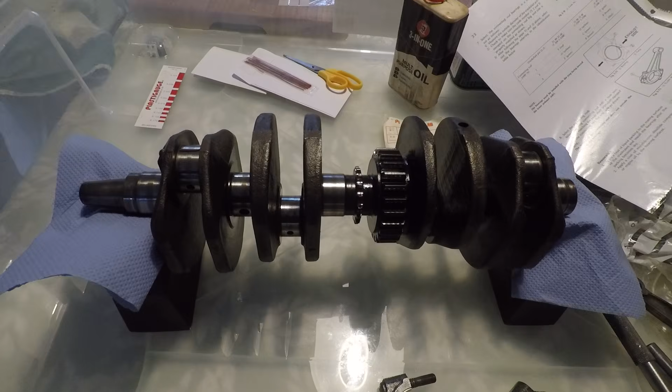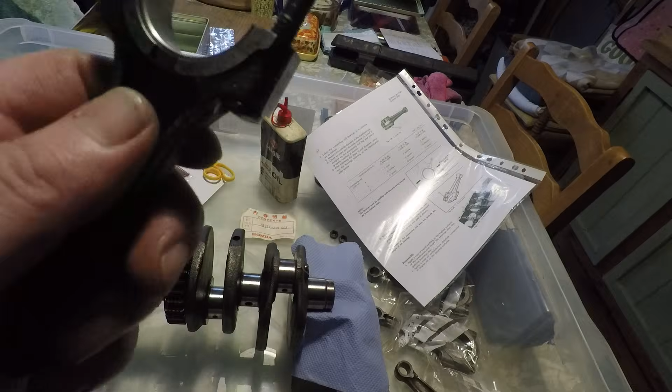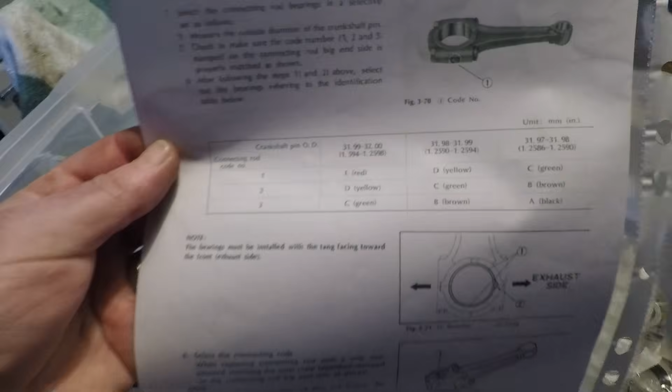Right, as you can see, I've got the crank here. I've managed to get some big end shells. I don't know if they're the right size. Reason being that these rods are supposed to have a number stamped on, so you can then refer to this little chart here. I think I have just lightly gone over this before in another video.

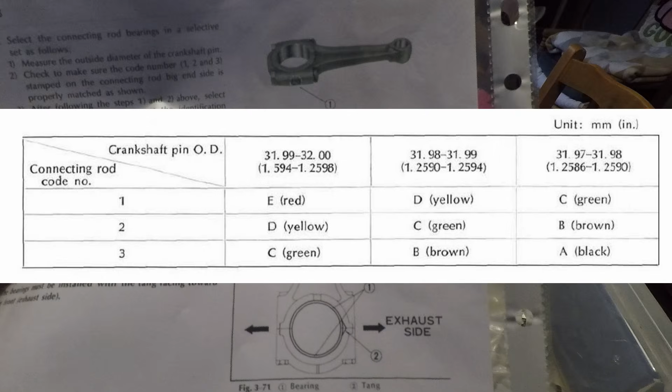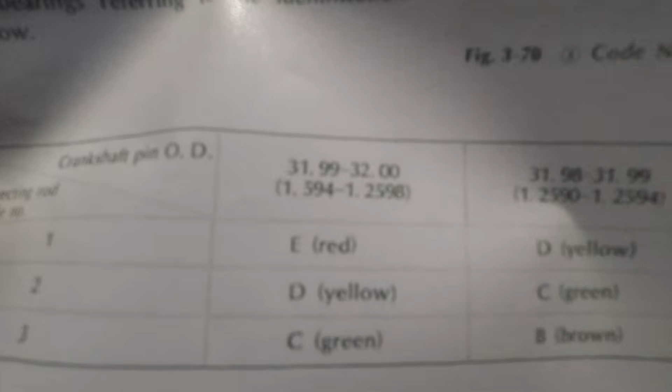So that would be either 1, 2, or 3 stamped on the side of the rod there. I'll put a picture of this up on screen, be easier to see. So you use that and the pin OD of the crankshaft to work out which bearings you need, which shells. They're all colour coded. The ones I've got are black.

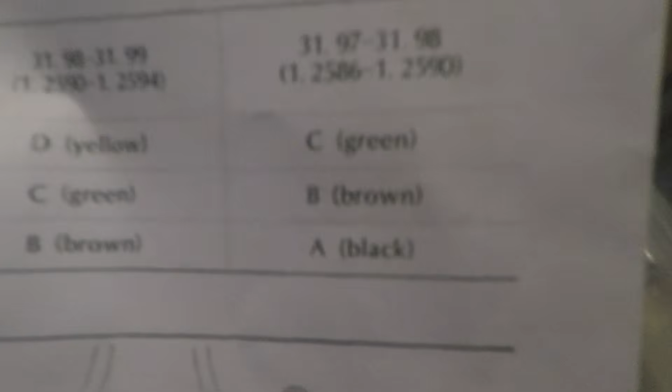I know what size the pins are. I've measured them with a micrometer. Where did I put that? And I'm in the kitchen, by the way. The wife is out, so this is probably the cleanest environment to do this.

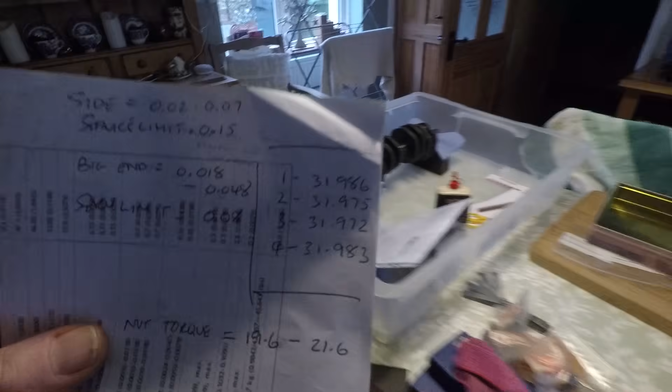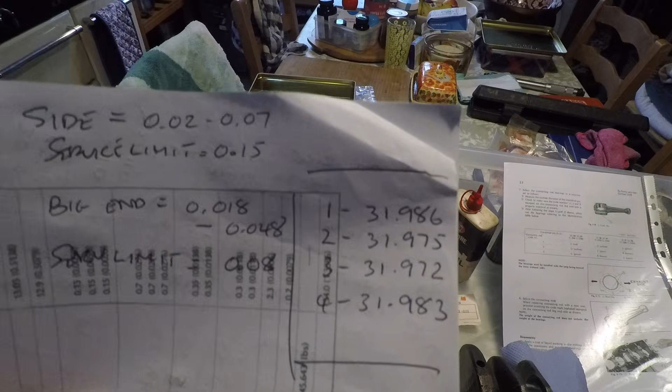Yeah, so they're the pin ODs I had. This is number 1. Yeah, so they're all sort of within that first row there. So, which means they need black, brown or green shells.

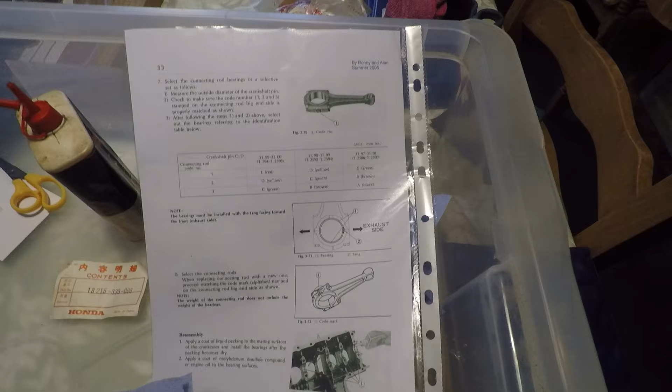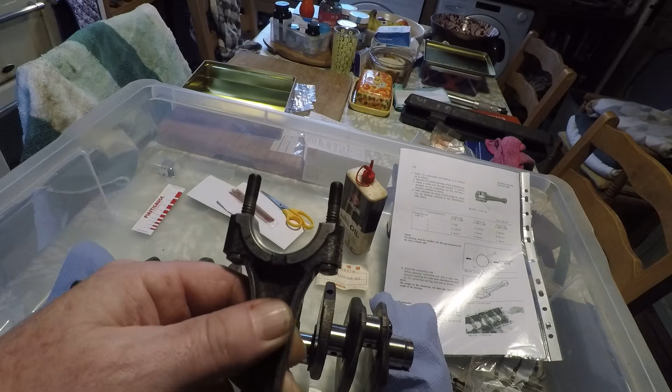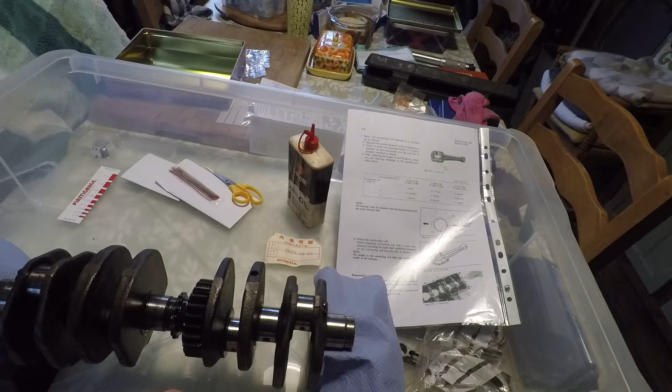The only reason I got these is because I happened to see them on eBay. They were half the price of what they are in David Silver's, so I thought I'll take a chance, get a set. At least that will point us in the right direction if they are wrong.

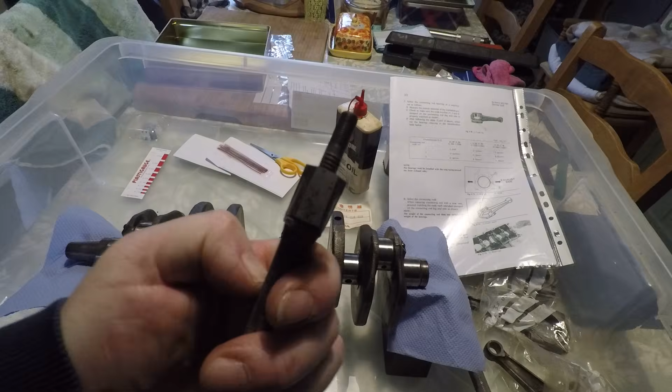So because I don't know what these are, I did try to measure them. It's not really easy to measure them, especially with snap gauges. I won't get consistent readings, so we're gonna go Plastigauge

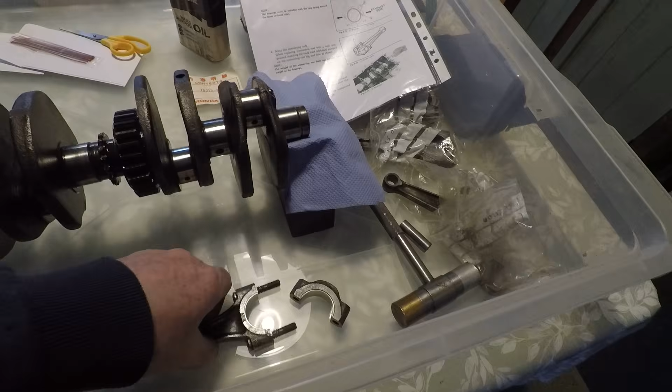to measure the clearance. So I've just got new shells set up in there, got a torque wrench. I've already just popped a piece of gauge in there, so I'll get that one on, torque it down, and we'll take it off, and we should get a reading from it, and yeah, see where we are.

Unfortunately, I can't leave the rods on there. I'm going to have to take them off again. I'm going to do these one at a time, then just bag them, because I've yet to find some crankshaft bearings, mains. I might be able to reuse the old ones, but I'll obviously need to Plastigauge them as well. But I haven't got the crank rod, the crankcase bolts, all of them anyway. I need 6 bolts to clamp that down.

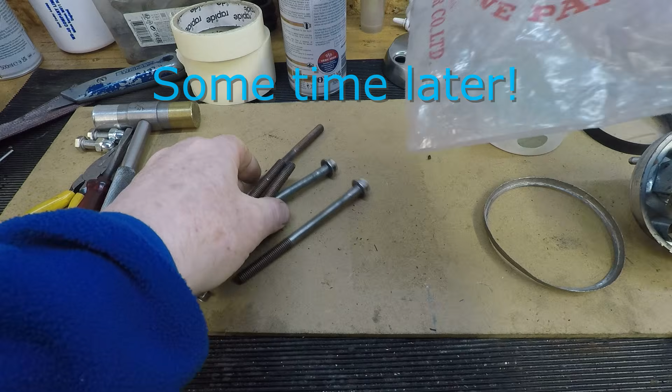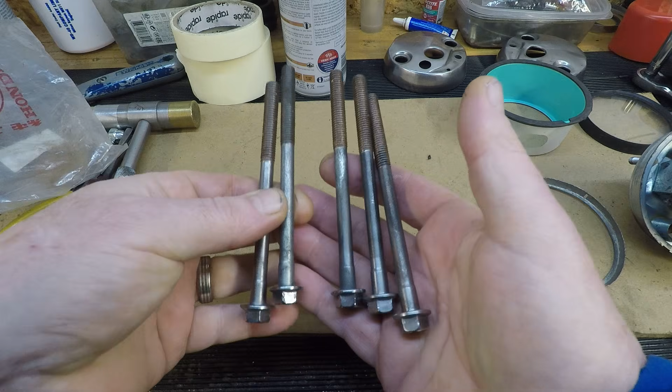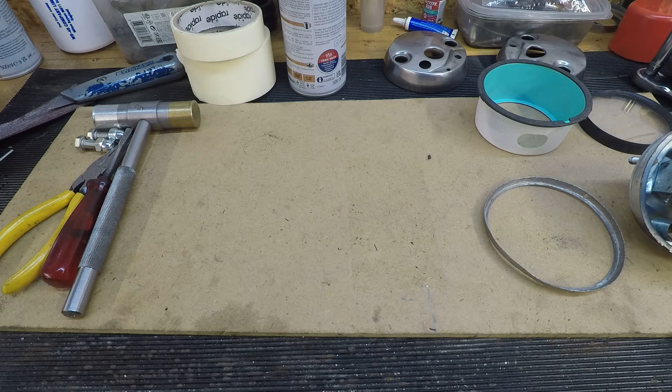Well, look at what turned up today. Thanks to a very kind viewer, Mark. I now have, with the one that I've already got, a full set of the longer crankcase bolts, which means I can get on and measure the other bearings, the mains. So yes, thank you very much, Mark. Much appreciated. I was really struggling to find those. Yeah, so that will assist me no end.

Yeah, the video for doing those bearings might well be sometime in the future, because I've got several things that I've already videoed and I already need to edit, get together, upload and all that. So yeah, but at least I can actually get on and do the work. That's the main thing. Well, that is some good news.

Anyway, yeah, so I will continue in what I'm doing at the moment, which is rebuilding, or not rebuilding, just smartening up these existing clocks that had been taken to bits, but they hadn't done a very good job at putting them back together, so I'm now working on those. But yeah, so thanks again, Mark.

Right, low battery, oh dear. Right, I better change the battery.

Well, that's been torqued down, cap has been removed. Most of the Plastigauge is in the shell rather than on the pin, but that doesn't matter, we can still measure it.

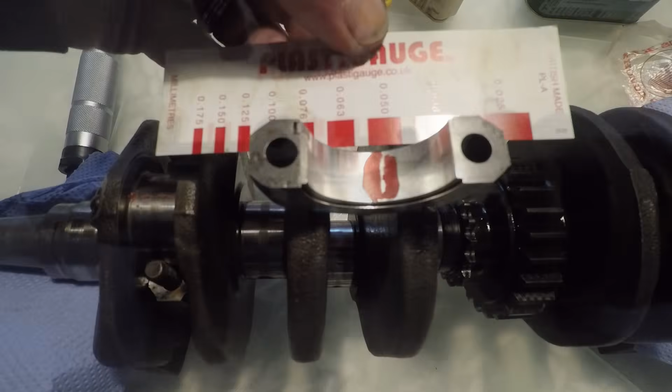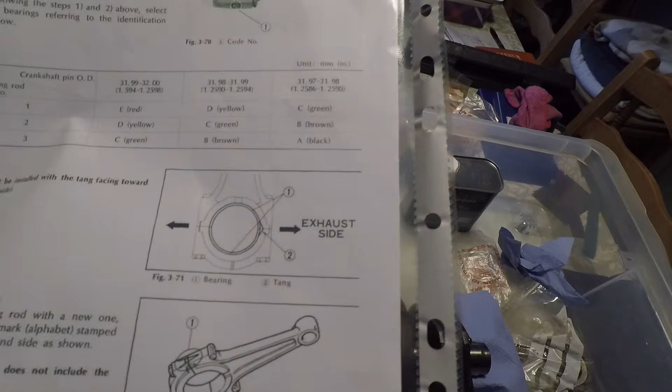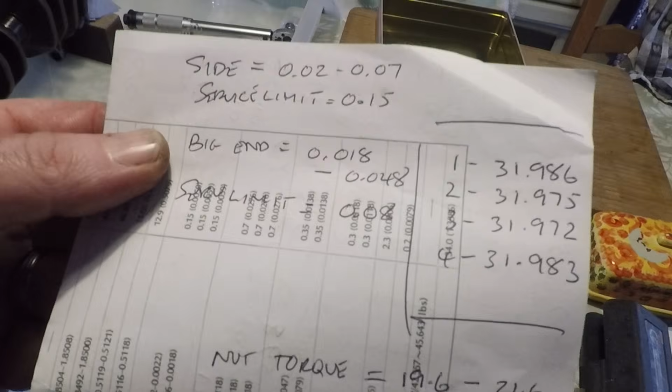So it should be between - I can't remember where I read that, but I did read it somewhere - between 0.018 and 0.048. Service limit is 0.08.

Right, so what I'll do, I'll just get on and do the rest of these.

I'll just mark that up as number 1, I'll actually bag it number 1. Because I don't know which rod, since this was all disassembled when I got this engine - the whole bike was completely disassembled, so I don't know which rod came off which position. So it doesn't matter too much if I swap them around, because I don't know if they're right or wrong anyway. Normally you'd mark your rods as you took them off, so you know where they came from, which big end they're off. But as I don't know that, it doesn't really matter. Well, it does matter, but there's nothing much I can do about it.

Right, so like I say, I'll do the rest of those and we'll have a little look at the end and see where we are with it.

Right, well I've done them all. Number 3 was tight - that was the tightest one. Number 1 was the loosest, if you like, the one with the most amount of clearance. That was the least amount of clearance, so I've just swapped the rods round on those.

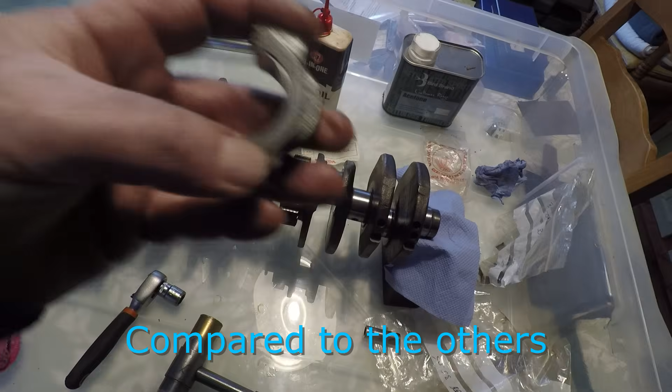However, number 3 is still a little bit on the tight side. I think what I'm going to do is take these shells out and have a bit of a polish up on the inside of these rods, and see if that makes a difference. If I can get some emery in there, that might just give me that little bit.

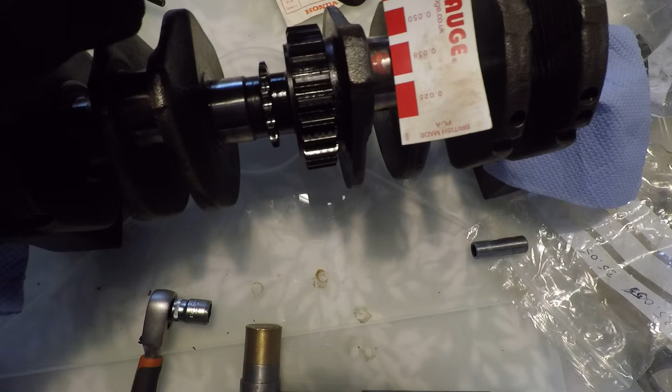Yeah, I mean you can't really see that very clear, I've smeared that a little bit. I keep smearing this number 3 for some reason, but it's kind of between 0.038 and 0.050.

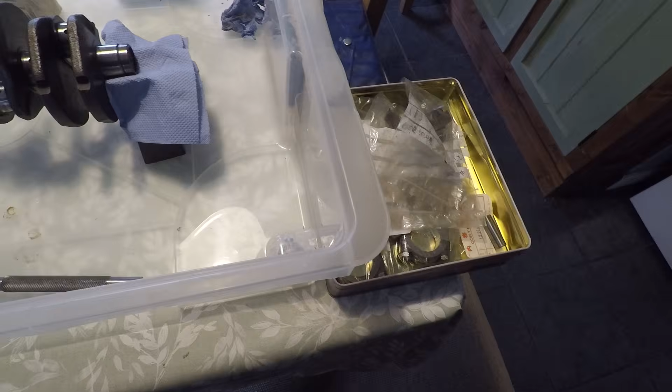Oh yes, little ends - they're all okay. I just measured them with a snap gauge, and also I used one of the old gudgeon pins, which cleaned up, measured that with a micrometer and used that as a bit of a gauge pin. They all feel okay.

Yeah, I better get all this stuff outside or out of the kitchen before the missus comes home anyway. Yes, we'll do that, have a bit of a clear up.

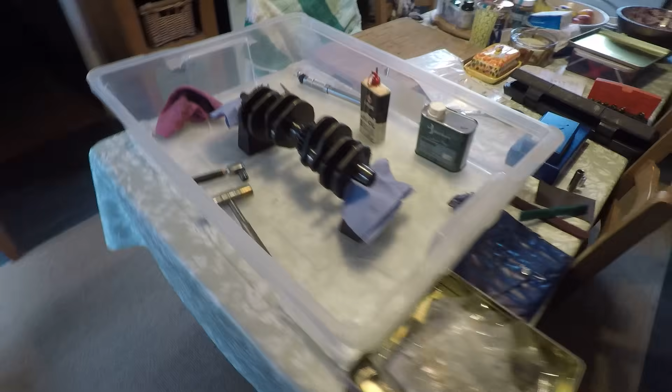Yeah, quite happy with that, I think. Like I say, it's just the mains now, sorting that out.

Right, don't know whether this will be a standalone video or whether I'll just keep the footage until I do the mains and then put it all together. I'll see how much I've got, so I'll make that decision then.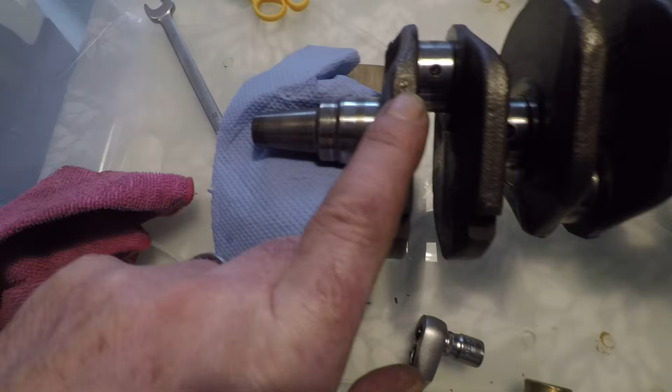Oh yeah, and by the way, these are numbered on the crank, 1 and 4, obviously 2 and 3 on the other side here. There's also supposed to be some white paint markings, but I haven't been able to find them. I forget what I was supposed to tell you, but I did see that in the forums, though I can't spot any other paint markings on there.